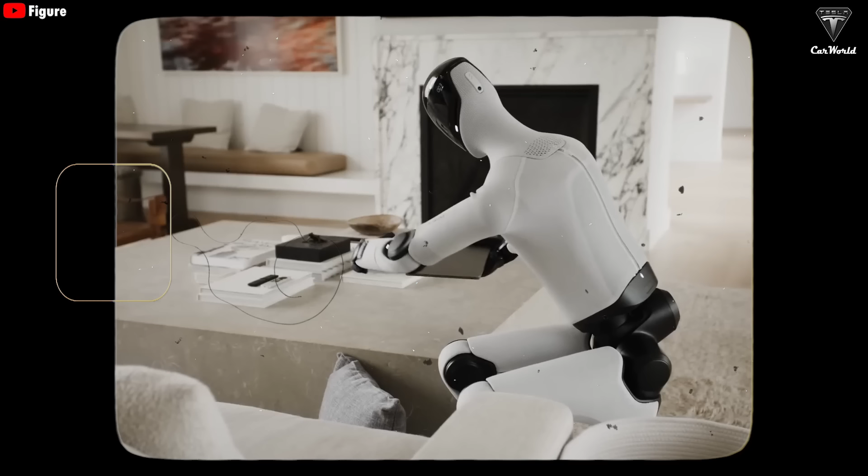We once dreamed about this in the 1970s science fiction movies. Now it's no longer just a cinematic special effect. Elon Musk promises that the Tesla bot Optimus will be a robot with a groundbreaking AI brain, capable of assisting humans with many tasks and household chores.

Tesla is the world leader in real-world AI, I would say. So, and then we're going to be making this robot Optimus, which is starting production hopefully summer next year.

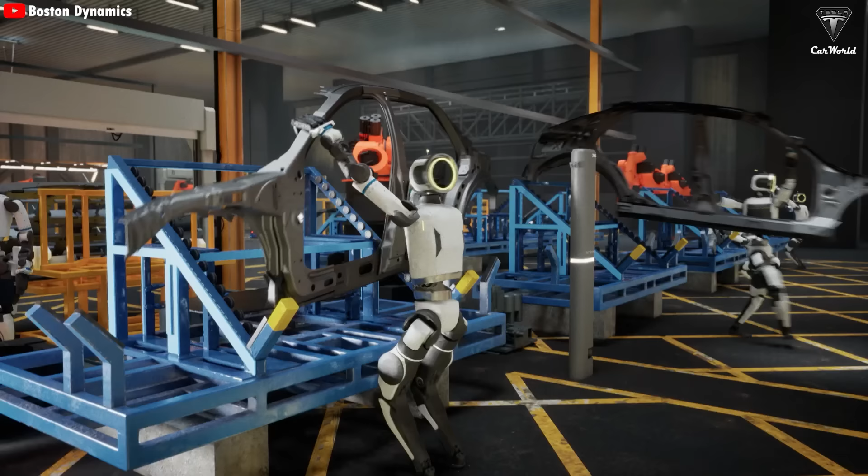Meanwhile, Boston Dynamics has just redefined the limits of precision engineering with its next-generation Atlas robot. Now it's time to officially take Atlas out of the lab. So for the first time ever in public, ladies and gentlemen, please welcome Atlas to the stage. Atlas's primary mission will be to move goods and components in warehouses and to take part in production lines at factories.

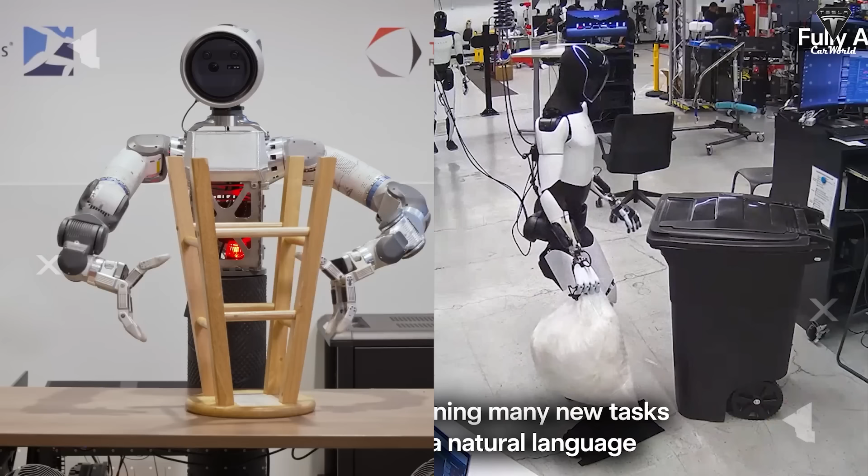But are these machines really ready to support us in real life? Today, we're going to set aside the marketing hype and dive into the truth. What does the future of America really look like? Let's find out right now.

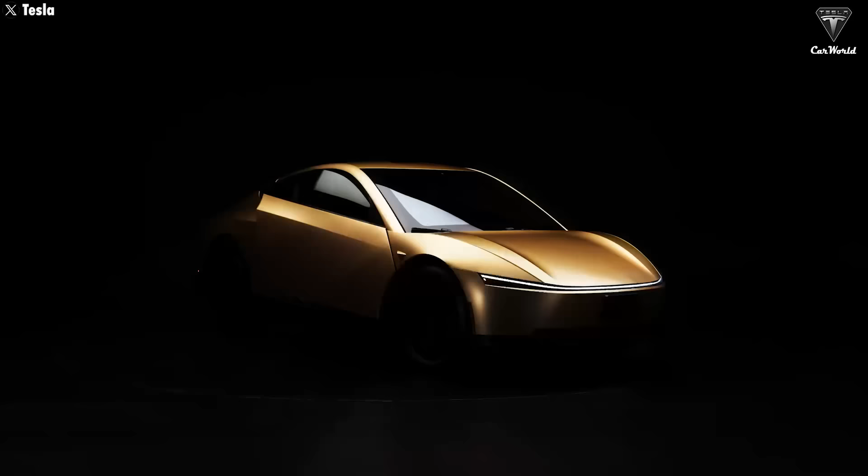We've already witnessed the computer revolution of the 1980s and the internet boom of the 1990s. Now you can probably feel a similar wave. AI and robotics are genuinely making reality hard to believe. Every time a video or image is posted online, most people comment, 'Is this AI?' That explains just how astonishing AI truly is.

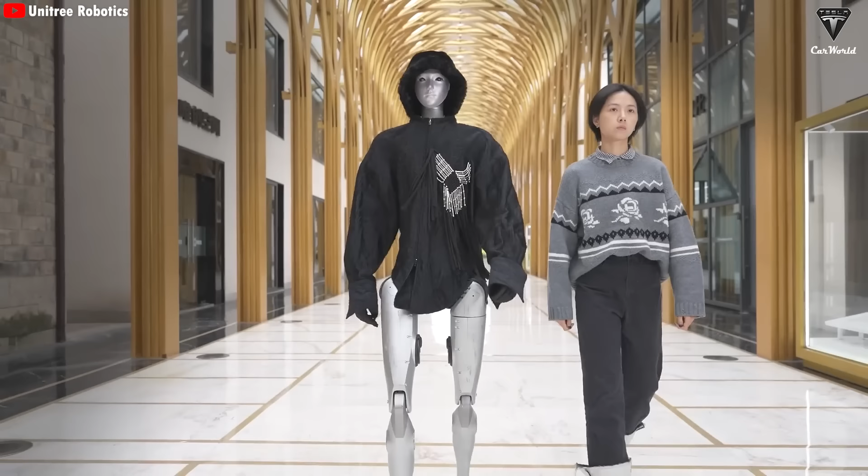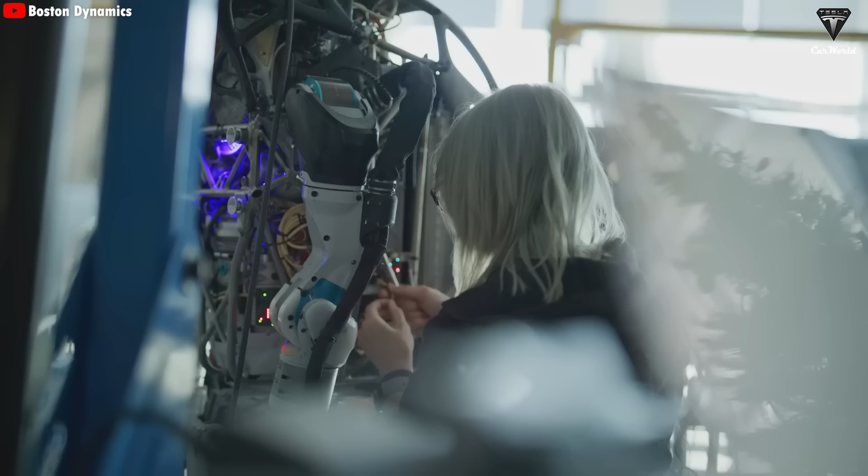This explosive growth has fueled an ever-growing ambition to embed AI into physical entities. That's why more and more humanoid robots are being created. For decades, Boston Dynamics has been the pioneering name dominating this field. They represent humanoid robotics in the US, doing it long before Tesla or any other company even considered it.

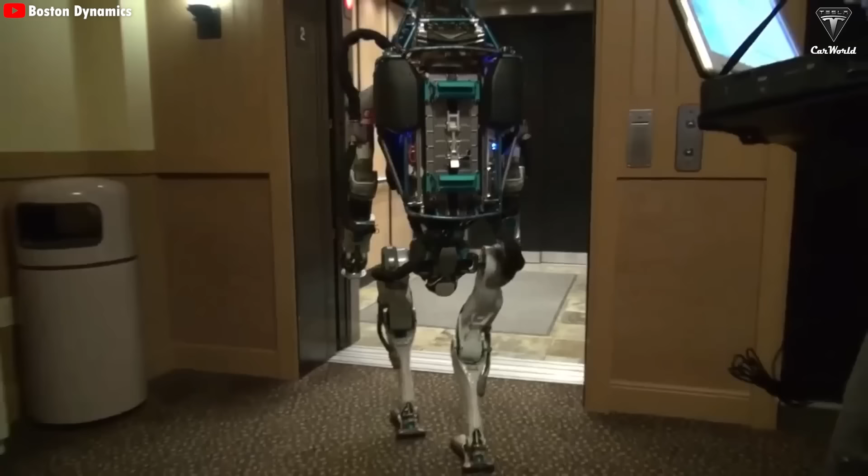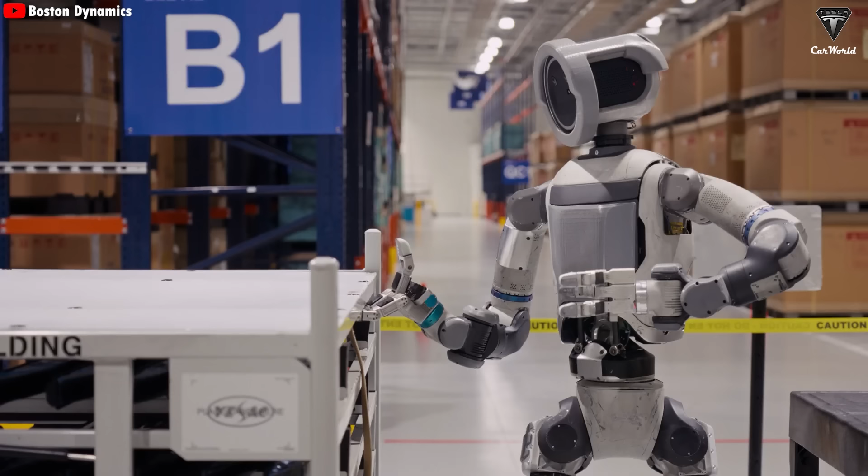Although early humanoid robot versions used powerful hydraulic systems that allowed them to perform acrobatics and traverse extremely rough terrain, hydraulic actuation is nearly impossible to manufacture at scale. That's why the newly launched, fully electric new Atlas has changed the game. It completely removes the limitations of human-like joints, allowing the robot to maneuver in tight spaces with a level of flexibility we've never seen in any biological organism.

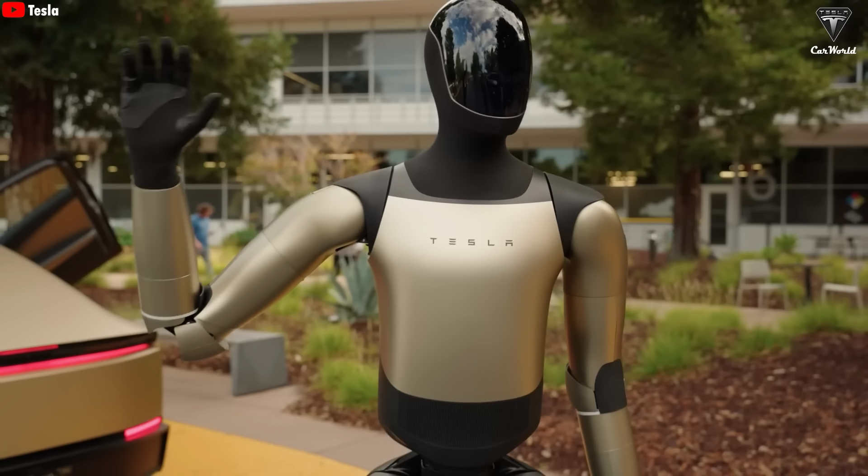However, on the other side, we have Elon Musk and Tesla. Elon Musk isn't trying to create an athlete or a show-off robot. Yeah, of course Optimus can run pretty fast and even dance, but that's only a small part of the picture. With Optimus Gen 3, Tesla's goal is far more practical: to create a worker, a helper. The key point isn't how far it can jump, but how dexterous its hands are.

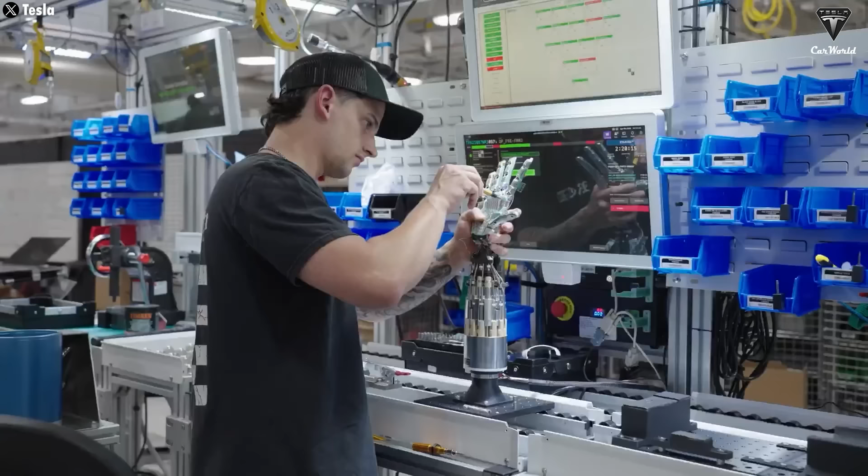Musk is betting on artificial intelligence and mass production to drive the price of a robot down to less than that of a car. On one side we have a hardware engineering giant trying to become smarter, and on the other, a software giant trying to perfect hardware.

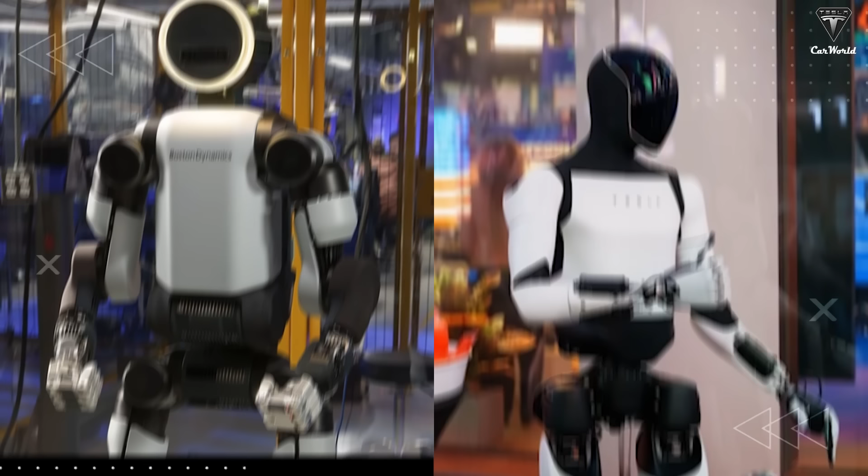Now we're going to take a detailed comparison of the design, hands, degrees of freedom, battery life, tactile sensor sensitivity, and the technologies inside these two humanoid robots.

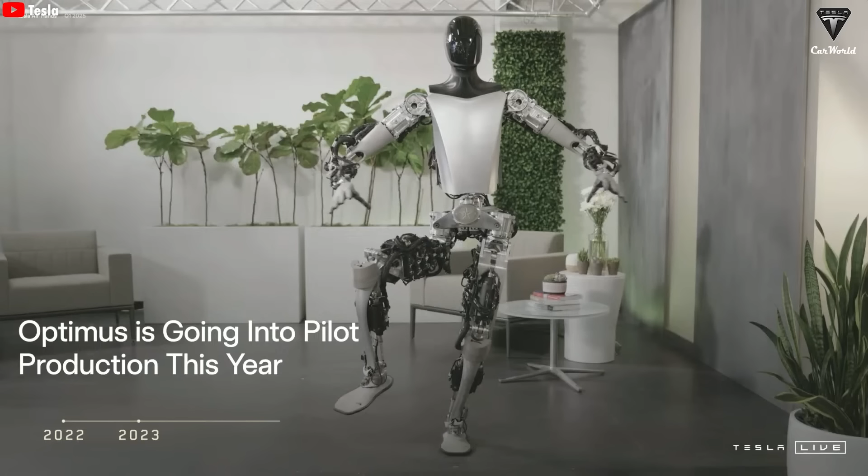Over time, we've witnessed Optimus and Atlas evolve from clumsy metal robots into sleek humanoid machines. If you look at Optimus in 2021, then Optimus Gen 1, Optimus Gen 2, and now version 2.5, it's clear that it has gone through significant improvements in appearance and materials, becoming far more refined than previous generations.

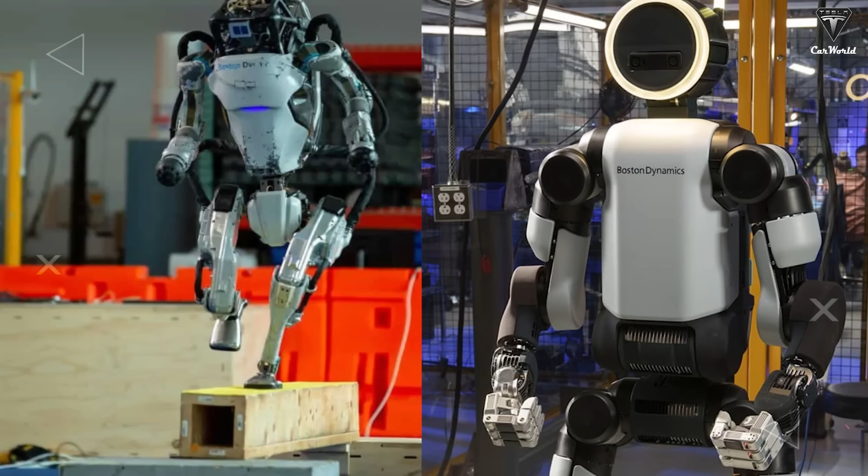Meanwhile, this is what Atlas looked like in past years, and this is the new Atlas that was recently unveiled on stage. Clearly, Atlas has completely abandoned its old design and re-emerged with a much more sophisticated humanoid form. The new version is almost unrecognizable, as it inherits virtually no features from the old robot.

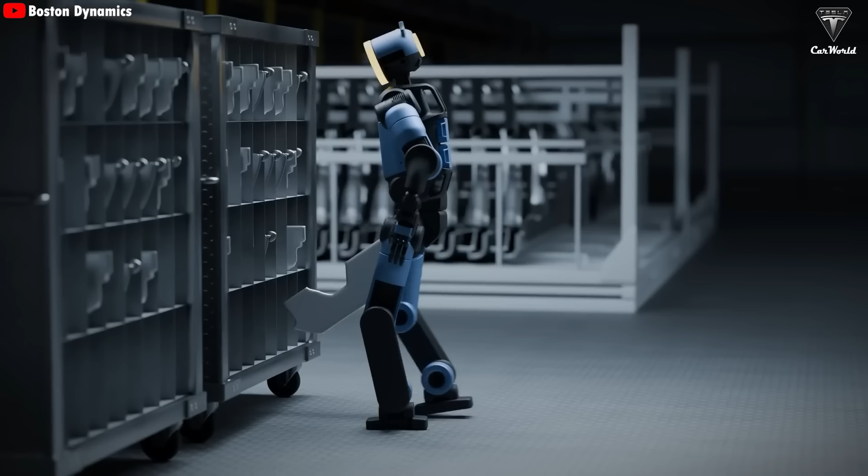Boston Dynamics' new Atlas marks a clear shift in design philosophy compared to earlier Atlas generations. It was unveiled at 6 feet 2 inches tall and weighing 198 pounds, and Boston Dynamics uses aluminum and titanium alloys for this new version.

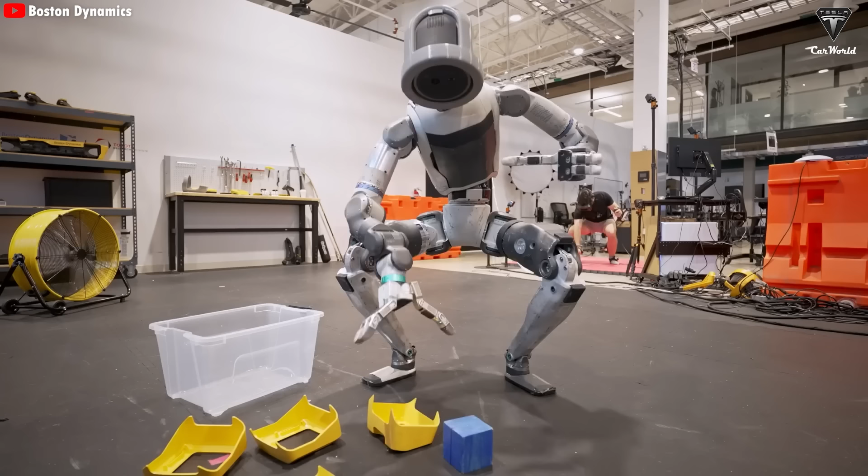Boston Dynamics CEO Robert Playter emphasized a major breakthrough in the new model: all of Atlas's joints can rotate 360 degrees, allowing it to perform complex movements with ease. As you can see in the way it stands up when first powered on, it's something that's both impressive and slightly uncanny.

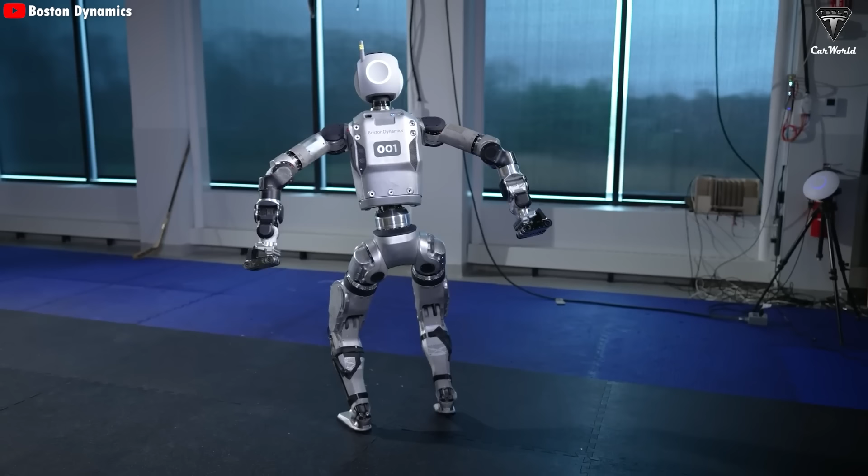Boston Dynamics has also stressed that Atlas's face was deliberately designed, a glowing circular display, so humans can clearly recognize it as a useful robot, rather than something trying to imitate a real human. We've also designed Atlas's head and face very purposefully.

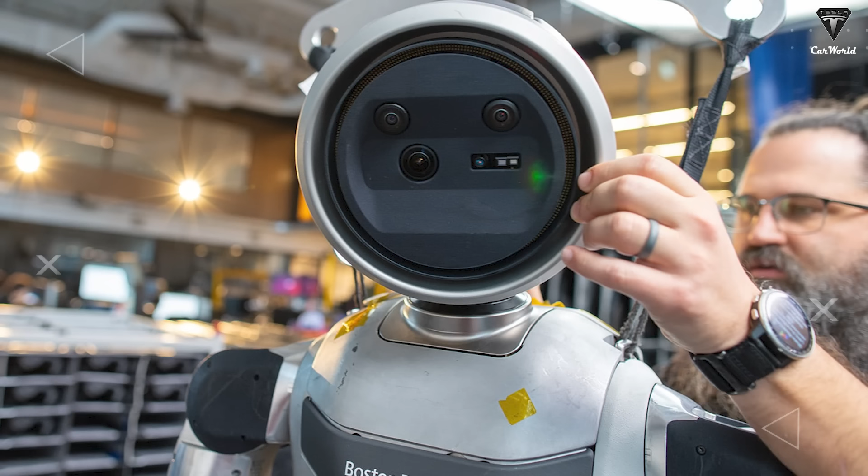We want folks working with Atlas to know that Atlas is a helpful robot, not a person. Instead of mimicking a human face or trying to appear friendly, the robot's head is designed as a compact, sealed engineering module that's clean, minimal, and non-expressive.

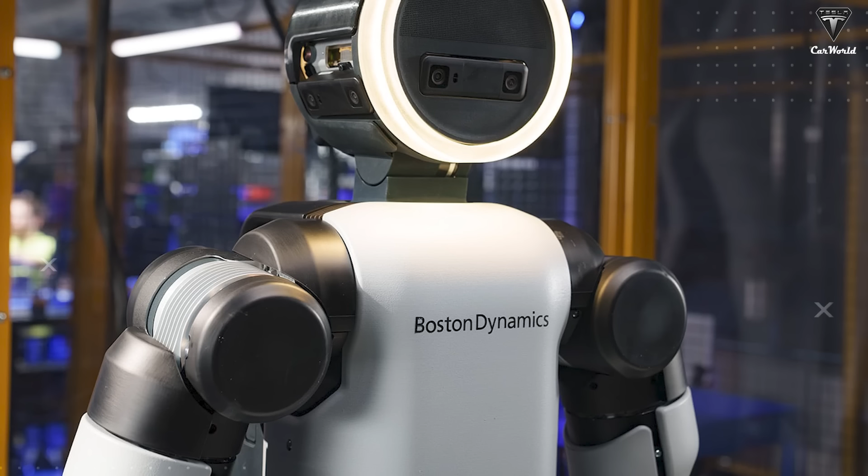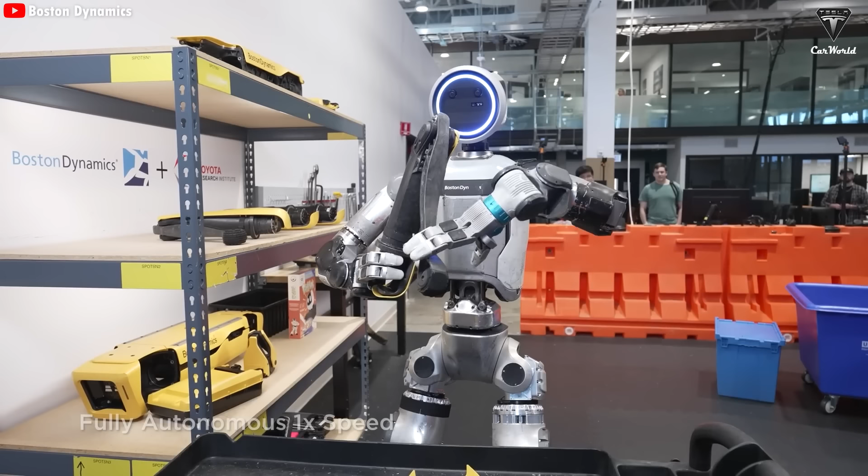Its simple geometry, flat surfaces, and seamless exterior help protect the internal sensor systems. The new Atlas head functions as a perception hub, not a communication tool. Vision and positioning sensors are discreetly integrated rather than showcased, allowing the robot to observe its surroundings, identify objects, and

navigate with high precision. Rather than exposing complex mechanical details, new Atlas adopts a cleaner, more industrial and practical style by abandoning the old hydraulic system and moving to a fully electric design. This reflects a clear push toward commercialization and greater efficiency in real-world work environments.

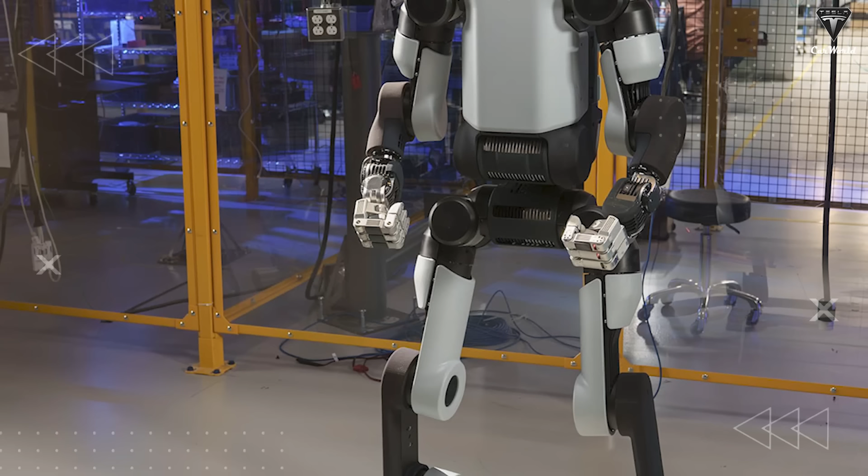If you look closely, the robot's entire body features clearly defined geometric forms, flat surface panels, and minimal unnecessary details, giving it a solid feel and making it easier to maintain. You can also see that the joints are more enclosed, reducing exposed wiring. This increases durability and lowers the risk of damage during impacts.

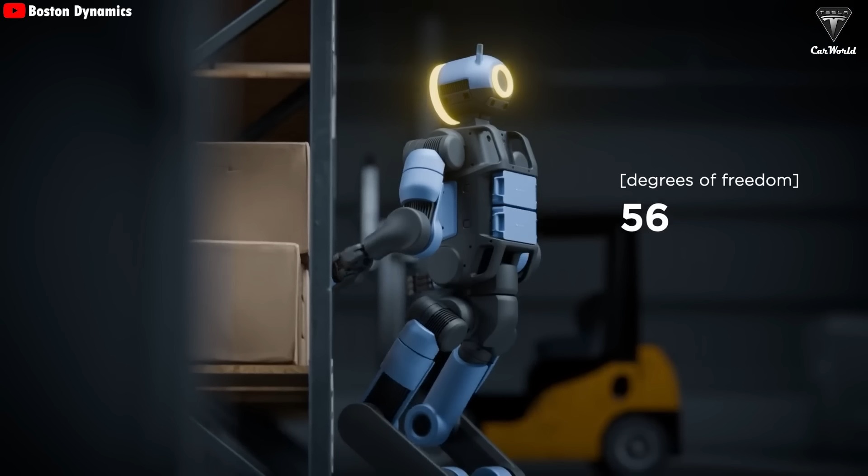The new Atlas can also reach up to 7.5 feet, allowing it to handle and transport items or components stored at higher levels. Turning to Optimus, we've talked a lot about its design already.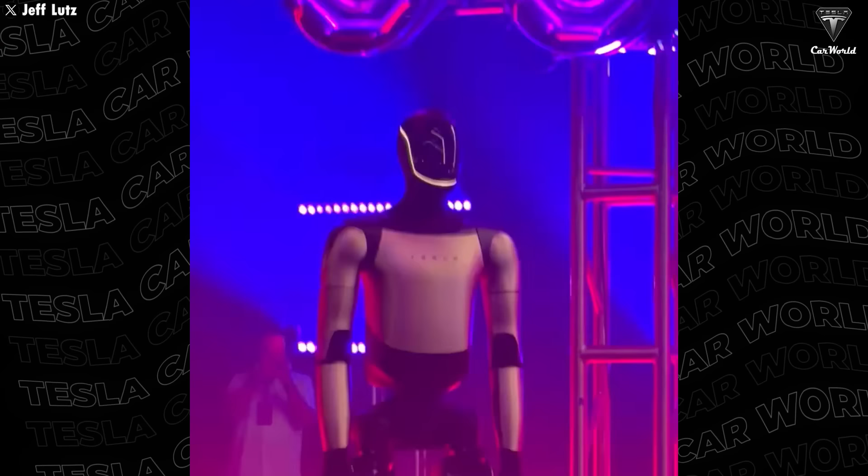For now, we're really looking forward to Optimus 3, which is expected to be unveiled next month, and according to Elon Musk, will look astonishingly human-like. When you see Optimus 3, it will seem as though there's someone like a person in a robot outfit, which is how we started with Optimus.

At the moment, with Optimus version 2.5, Optimus already has what can be considered one of the best body proportions and overall designs on the market. To be honest, we still haven't seen anyone do design better than Tesla.

Don't get us wrong, that doesn't mean other robots look bad. It's just that the Tesla bot feels a bit more polished. Version 2.5 doesn't introduce many major changes compared to version 2: a gold color scheme and better built arms, with fewer exposed cables.

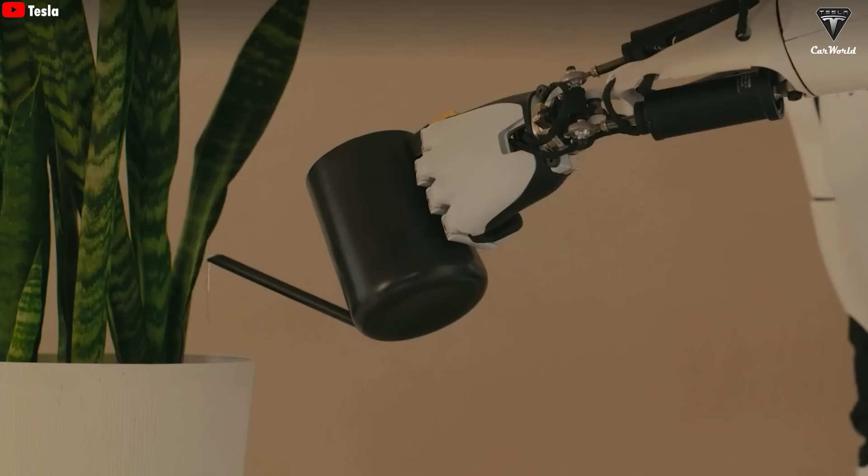Compared to Atlas, Optimus has slightly more balanced dimensions and weight, standing at 5 feet 8 inches tall and weighing 125 pounds. Of course, each manufacturer has its own goals and strategies when it comes to robot design.

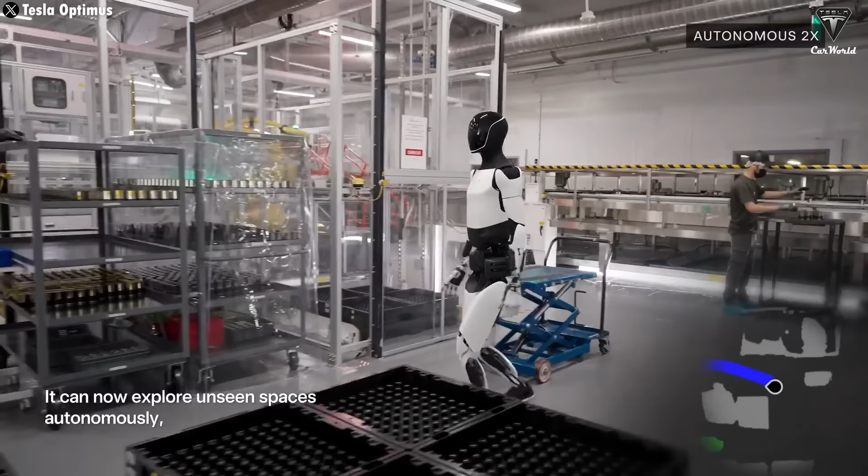Moving on to battery life, so far Tesla has only revealed that the Tesla bot will use 4680 battery cells, and Elon Musk has stated that Optimus could operate for an entire day with productivity up to 5 times that of a human.

Like if Optimus, I think, could probably achieve 5x the productivity of a person per year because it can operate 24/7. It doesn't even need to charge. It can operate tethered, so it's plugged in the whole time.

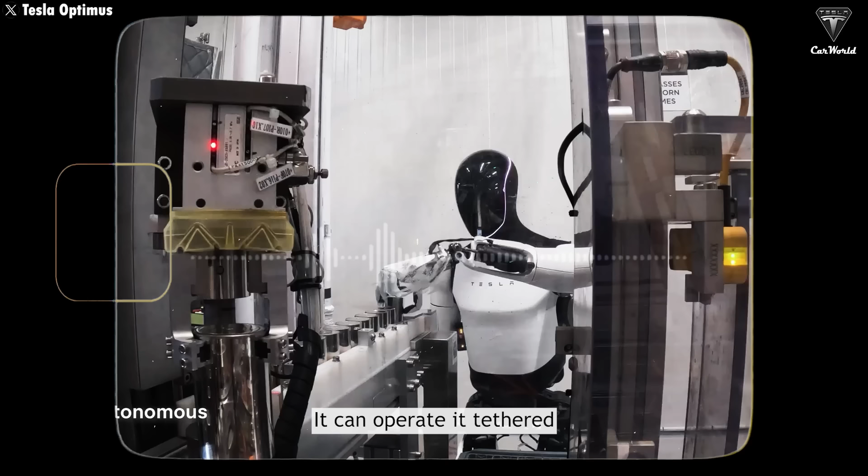So we still can't say for sure how long the Tesla bot can operate continuously, but it's likely around 8 hours. After all, Tesla has enormous battery resources and extensive real-world experience with electric vehicle batteries, which could be one of its key strengths.

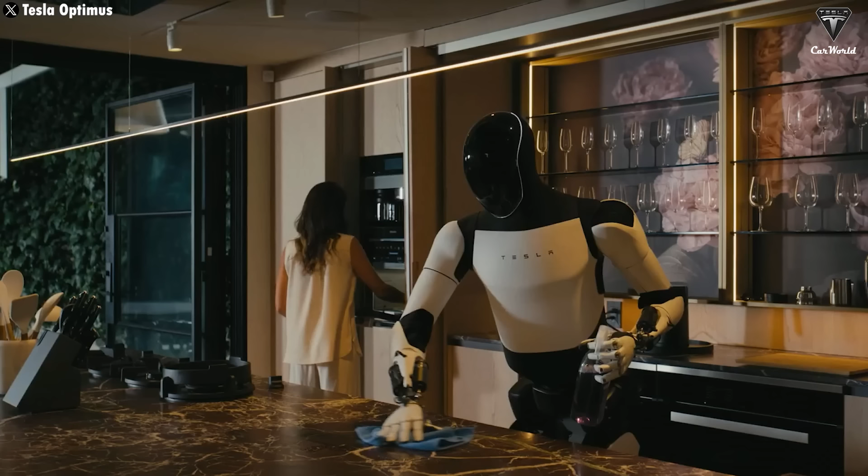Back in 2022, the Tesla bot prototype was introduced with a 2.3 kilowatt-hour battery pack, but as of now, we still don't know how much Tesla has upgraded the battery for version 2.5.

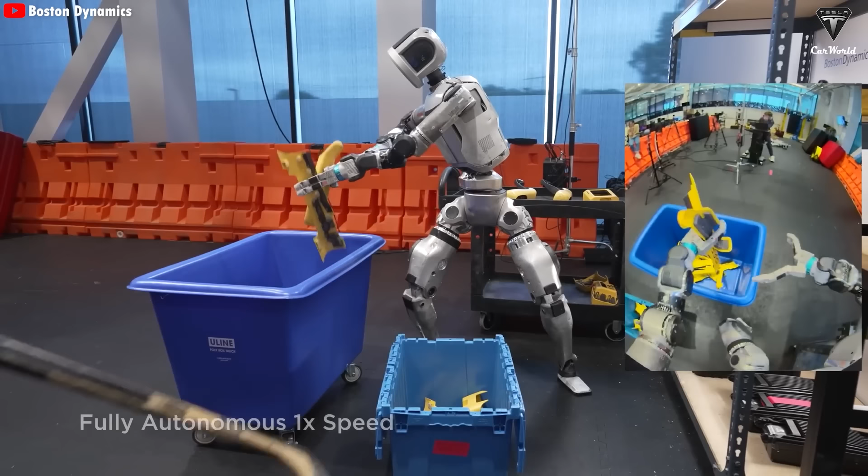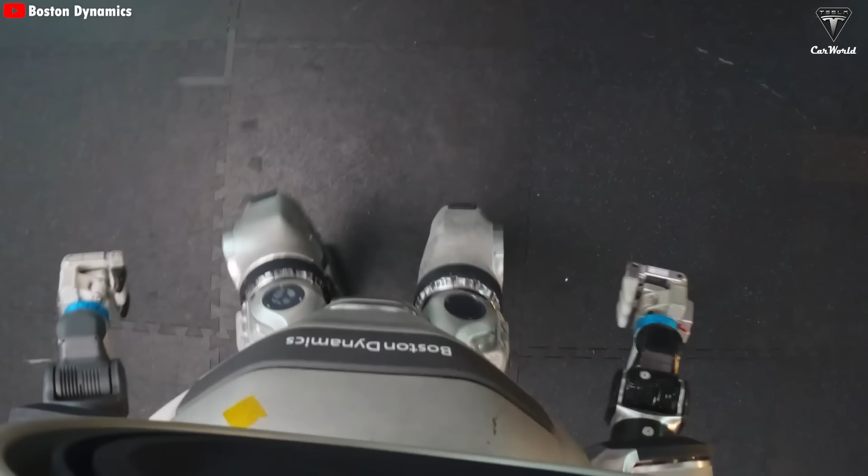Meanwhile, Boston Dynamics has announced that Atlas can operate continuously for about 4 hours. The real breakthrough lies in its dual battery system with automatic swapping. Similar to the Tesla bot, when the battery runs low, Atlas can autonomously return to its station, swap in a fresh battery, and immediately get back to work, ensuring that production lines are not disrupted.

But that's not the biggest breakthrough in the new version. New Atlas marks a major engineering leap with a total of 56 degrees of freedom. This number is double that of the now retired hydraulic version.

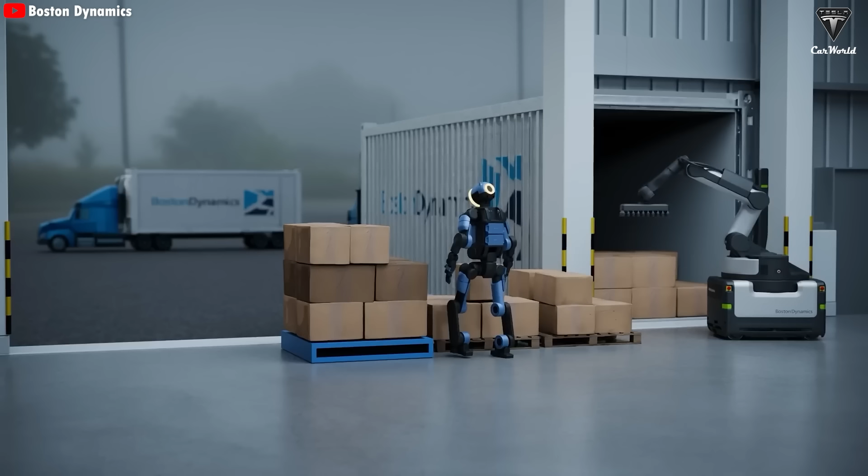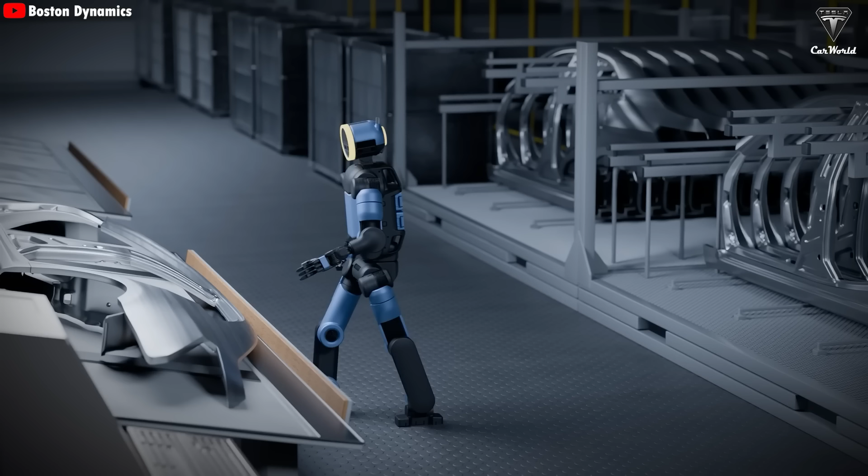As you can see in task demonstrations, the robot achieves a level of flexibility far beyond the movement limits of previous models. Of course, some scenes of Atlas performing tasks are still partially created using computer graphics for simulation, so we're only focusing on what these robots have actually proven in real-world demonstrations.

Thanks to its advanced electric joint system, with 360-degree rotation at key points such as the hips, neck, and waist, Atlas can perform complex movements, stand up from awkward positions, and move efficiently in tight spaces without needing to rotate its entire body.

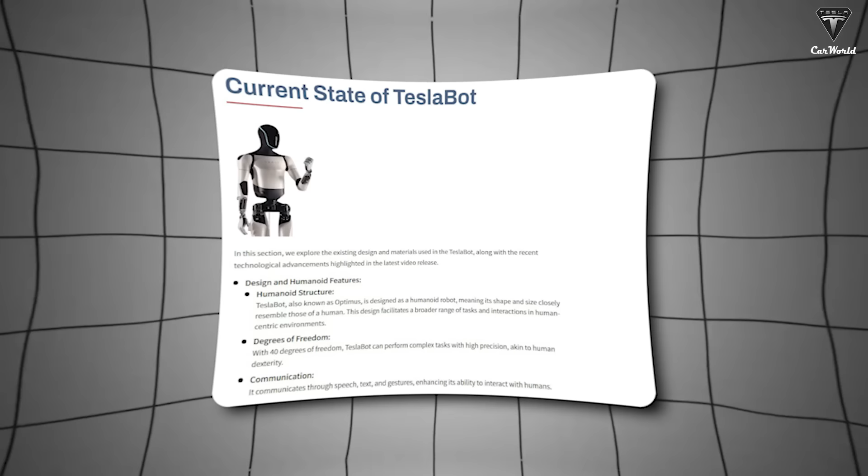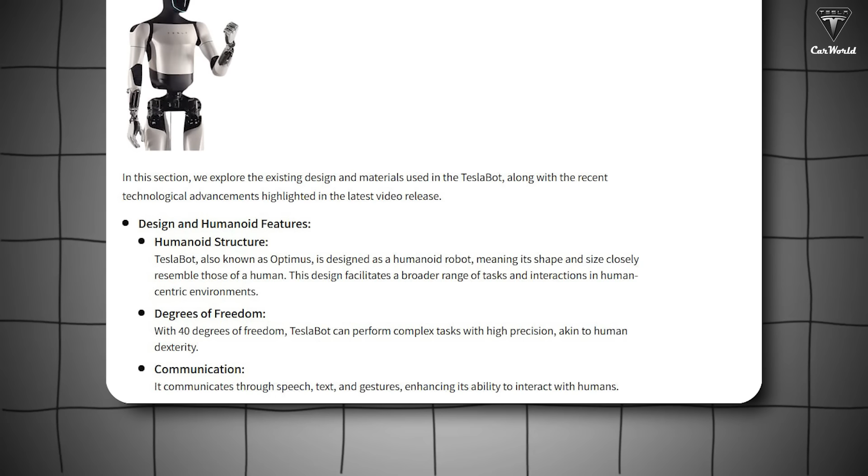Elon Musk has not yet disclosed the total number of degrees of freedom for Optimus, but based on information from ChatGPT and Google, estimates suggest that Optimus currently has around 40 to 44 degrees of freedom, fewer than Boston Dynamics' Atlas. However, this does not significantly affect the level of dexterity the Tesla bot can achieve.

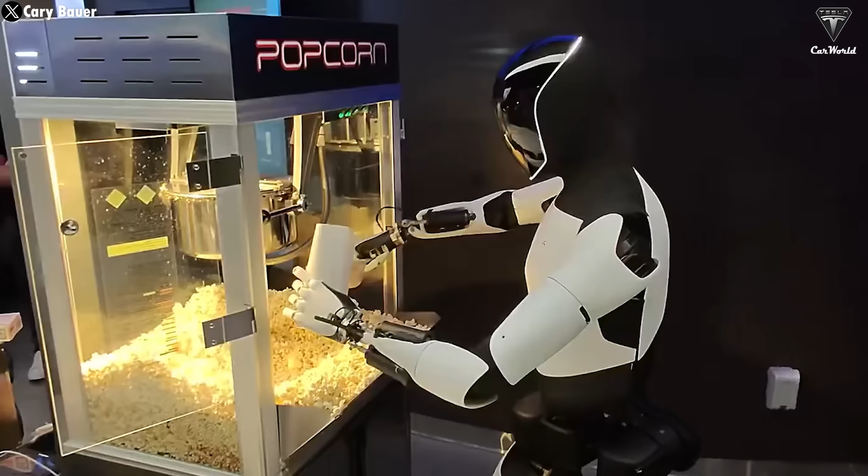We've already seen it perform some quite impressive tasks, right? It even served drinks and popcorn at several events last year.

That said, we've seen very limited demonstrations of Tesla bot lifting heavy objects. The last notable example was when it carried a 24-pound battery tray inside a factory. By contrast, Boston Dynamics states that Atlas can lift loads of up to 110 pounds, with a sustained working load of 66 pounds. This gives Atlas an advantage in certain tasks compared to Optimus.

What do you think about this aspect? Would you choose Optimus or Atlas if you needed it to bring you a beer?

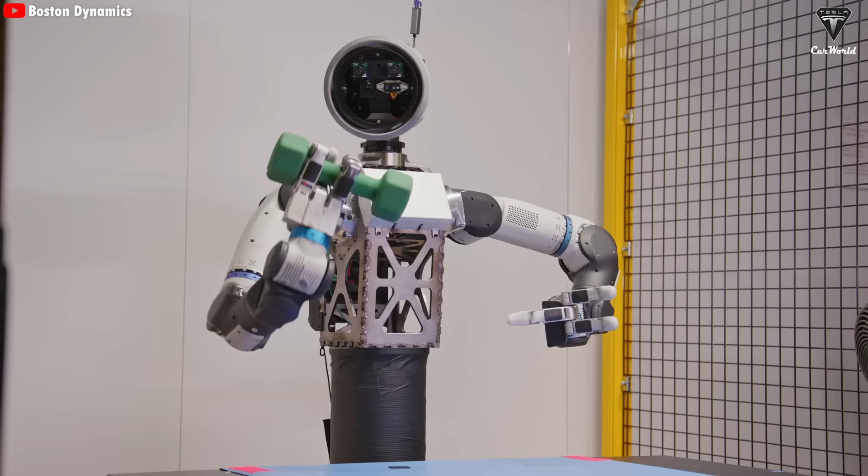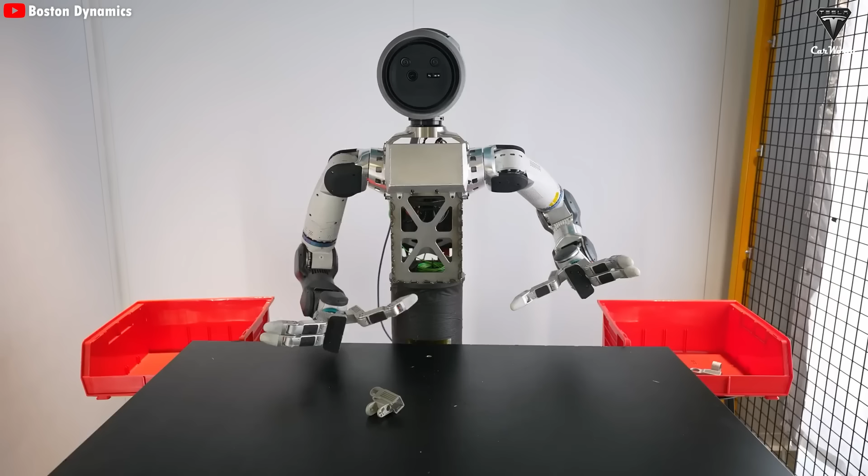First, autonomous mode represents the pinnacle of hardware AI integration. Atlas is confirmed to be equipped with advanced artificial intelligence powered by NVIDIA chips, enabling it to learn new tasks. In this mode, the robot operates using machine learning models and data from its computer vision sensor systems. Instead of needing humans to command every single step, Atlas can perceive its surroundings, build a real-time 3D map, and make its own decisions to complete predefined tasks, such as moving components inside a factory from point A to point B. This autonomous capability is powered by reinforcement learning algorithms, allowing the robot to maintain balance and handle unexpected situations like obstacles or slippery surfaces without external intervention.

In essence, this mode of operation is very similar to the direction Tesla is pursuing with Optimus. Optimus uses the same AI brain as Tesla vehicles to process data. It can recognize objects, analyze situations, make predictions, and plan movements in real time.

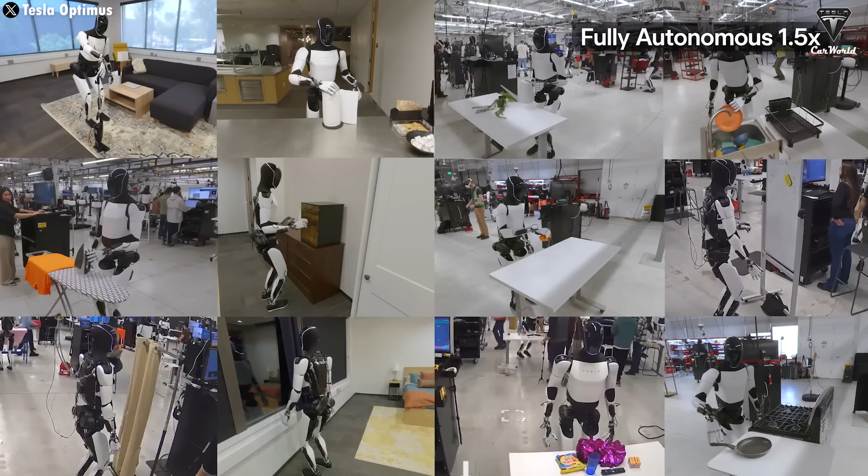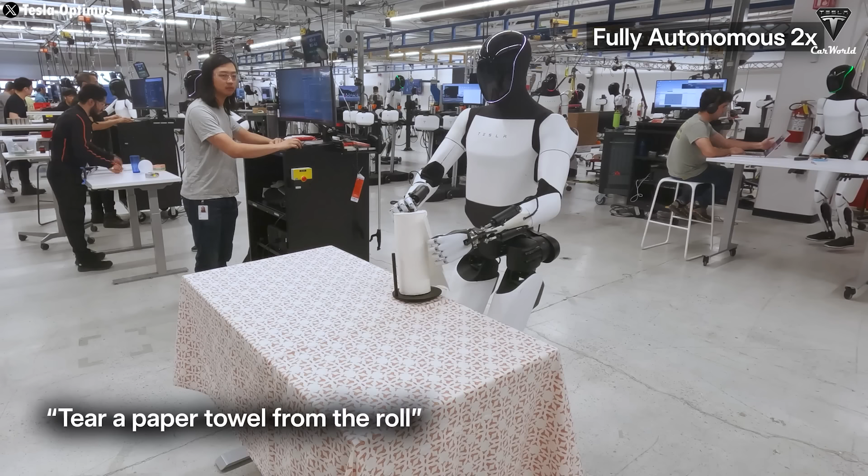To perform useful tasks, Optimus is trained on billions of video frames. Notably, Tesla engineers wear motion capture suits to demonstrate sample actions, such as picking up parts or folding clothes, which the robot then learns and reproduces on its own. Thanks to this training data and its ability to analyze and predict scenarios, the robot can navigate, avoid obstacles, and carry out delicate tasks without humans controlling every step.

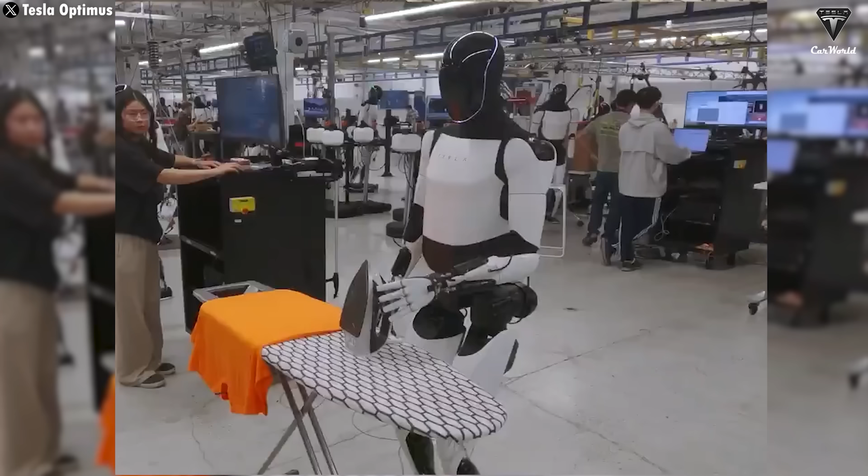Boston Dynamics has stated that once Atlas learns a new task, that capability can be instantly replicated across the entire robot fleet. Yeah, this closely mirrors Tesla's data-sharing approach as well. When one Optimus learns how to cook, that knowledge can be shared across the entire network of other Optimus robots instead of training each one individually.

This is truly a major leap forward for both companies. Once again, what do you think? If you owned both of these robots in your home, would you be willing to pay for them?

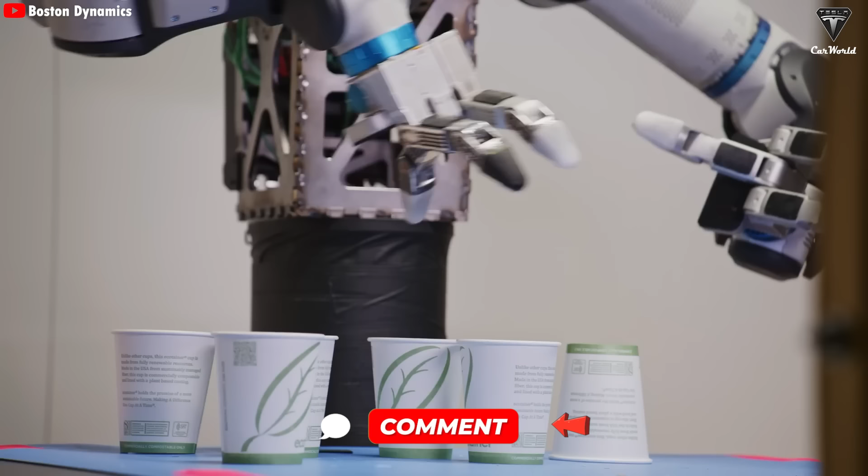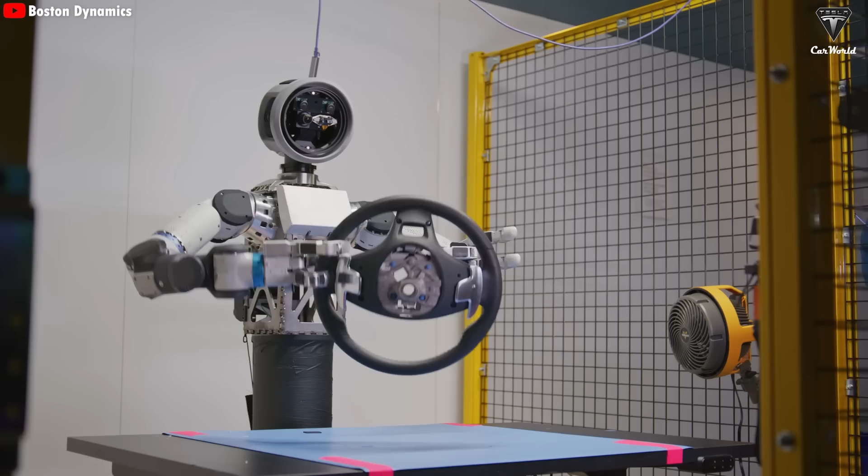Let's go back to the second mode Boston Dynamics introduced, teleoperation. This mode plays a crucial role in training and handling tasks that require high precision and fine motor skills. Engineers can use motion capture suits or VR equipment to step into the robot. When a human performs a movement, the control software translates that data into corresponding motor commands for Atlas.

This is exactly how Boston Dynamics collects behavioral data to train its AI. Humans demonstrate, the robot records, and then optimizes the action.

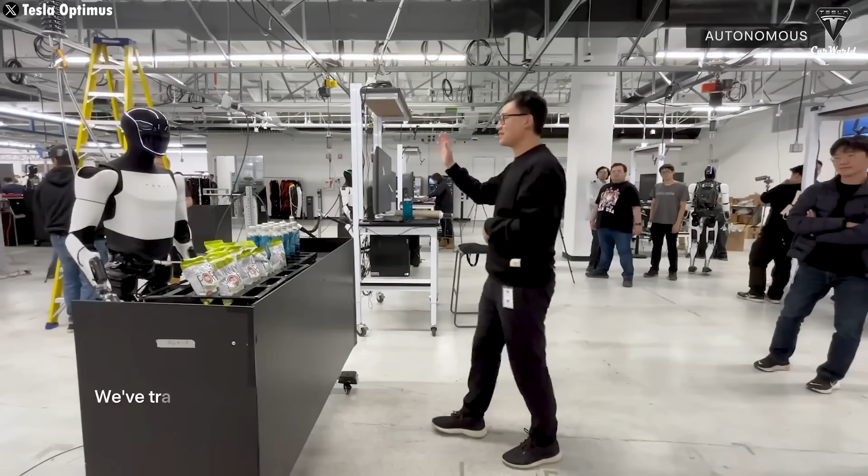Tesla is doing something very similar with Optimus, but clearly public opinion has been more negative toward Tesla. Part of this is because Elon Musk rarely mentions that the Tesla bot is remotely controlled during training, which has led many people to assume that Optimus is already fully autonomous.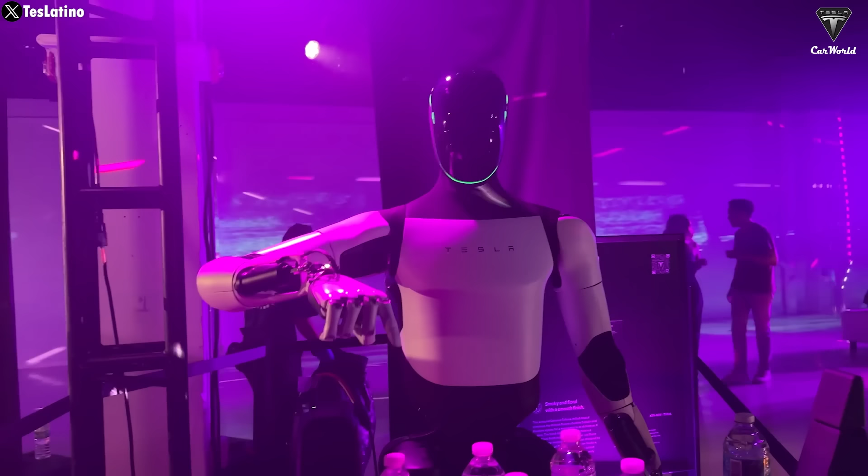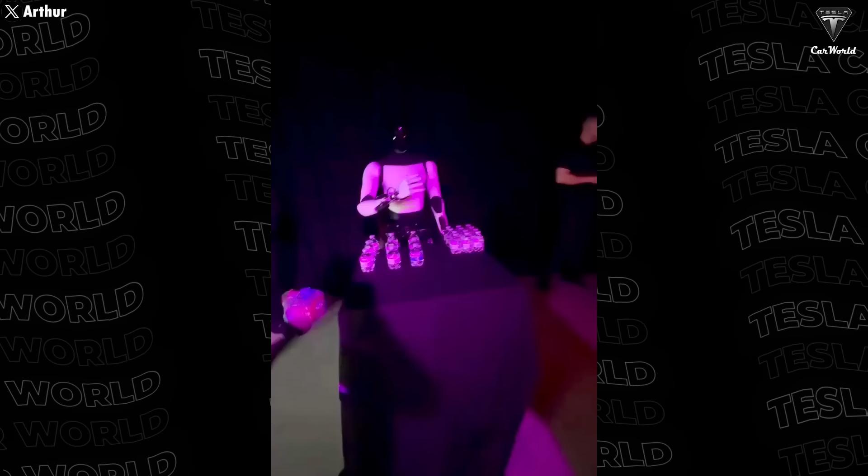One of the most heated discussions came after the incident where Optimus fell during an event late last year. It was later revealed that the robot was being teleoperated rather than acting autonomously. This incident caused people to question Tesla's progress with humanoid robots and increased skepticism toward the use of teleoperation in robot training.

What do you think about humanoid robots being teleoperated to perform tasks? Let us know your views.

Okay, finally, there's the tablet-based control interface via the Orbit software. Boston Dynamics states that the robot can easily connect to MES, WMS, and other industrial systems through Boston Dynamics Orbit software.

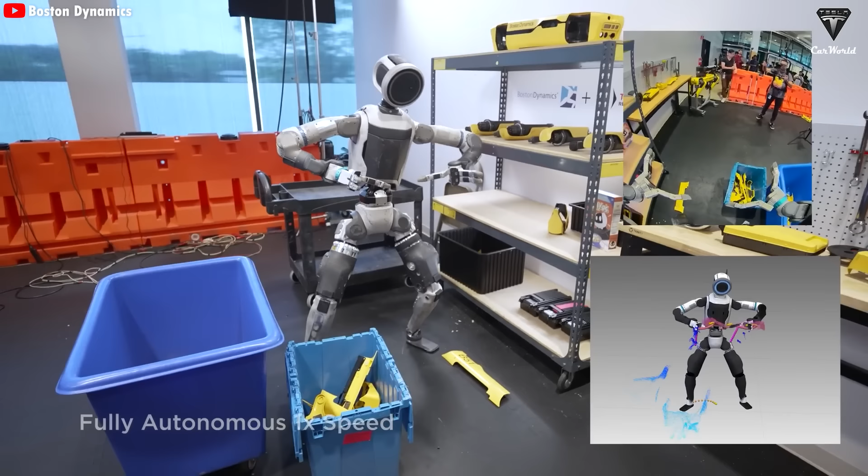This is the most management-oriented and practical operating method in an industrial environment. Instead of using complex joysticks, operators only need to tap and drag on a touchscreen to set destinations or select pre-programmed action scenarios. The interface provides a comprehensive overview of battery status, operational maps, and live video feeds from the robot's eyes, making it as easy to supervise an entire fleet of Atlas robots as controlling a smart device at home. The combination of these 3 modes creates a complete operational ecosystem, allowing Atlas to operate with independent intelligence while still coordinating smoothly under human supervision.

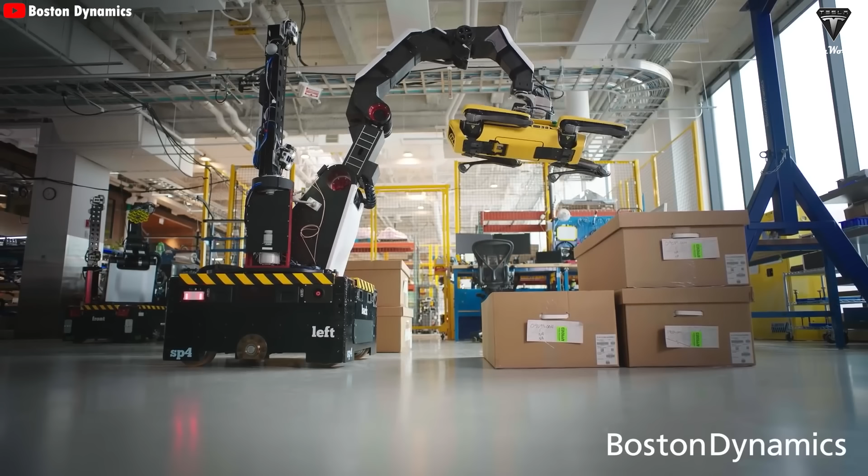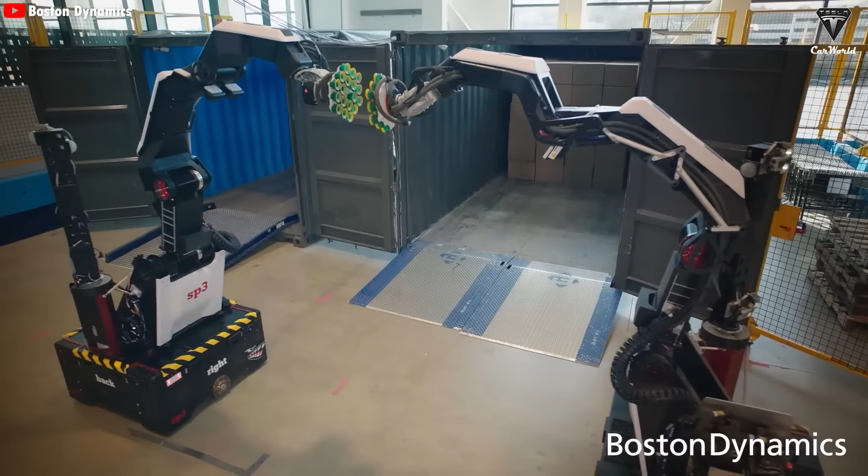Hyundai acquired Boston Dynamics in 2021 in a deal that valued the company at $1.1 billion. The automaker has long predicted that robots would become increasingly common in its factories over time. And with today's demonstration, Hyundai hopes to prove that its robots are more advanced and capable of handling physical tasks better than Tesla's Optimus. Meanwhile, Tesla has ridden the recent boom in artificial intelligence to reach a market capitalization of over $1 trillion, more than 15 times that of Hyundai.

Elon Musk has repeatedly emphasized that Tesla Optimus will be the company's #1 product and the most promising path to turning Tesla into a $25 trillion company.

However, there is a significant gap between the expected prices of Atlas and Optimus. Transitioning Atlas from a research platform to a commercial robot is certainly a major milestone for Boston Dynamics and its parent company. That said, mass-producing Atlas will undoubtedly be an extremely costly effort for Hyundai. While the company has not disclosed Atlas's production cost, Boston Dynamics sells its Spot robot for around $75,000 per unit. As a result, we wouldn't be surprised if Atlas ends up costing roughly 3 times as much as the Spot robot.

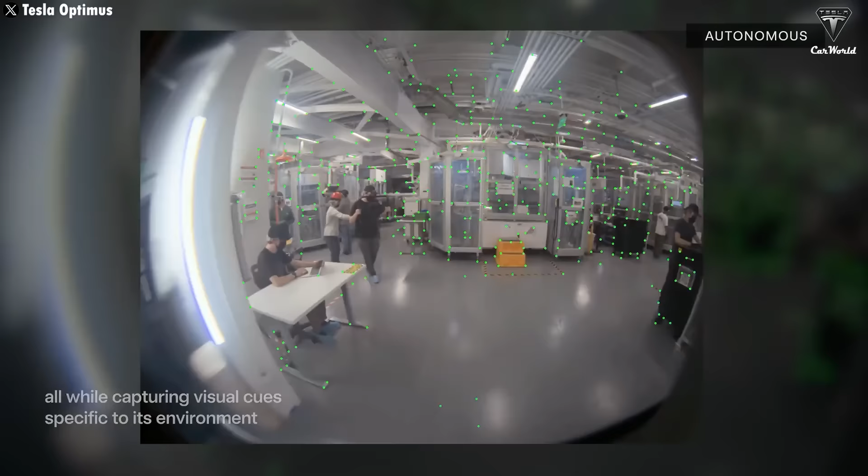On the other hand, Elon Musk has said at least 5 times that once Tesla can produce around 1 million Optimus robots per year, the final price of Optimus could drop to roughly $20,000 to $30,000. Yeah, basically half the price of a car.

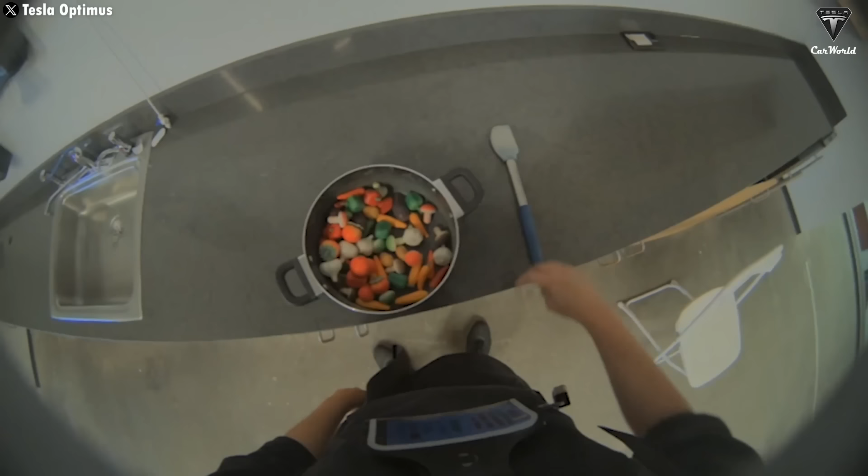Elon Musk's strategy is pretty straightforward: mass production to drive costs down. Tesla isn't just building robots. They're setting up a massive manufacturing operation, similar to what they did with electric vehicles. They already have the factories and the ability to design everything in-house, from AI chips and batteries to mechanical joints, allowing them to control costs down to the last dollar. Tesla's goal is to turn Optimus into a household product anyone can afford, essentially a personal helper that costs about as much as a used car.

Of course, there's still a long road ahead before they reach that price point. We expect the initial price to land somewhere between $80,000 and $120,000.

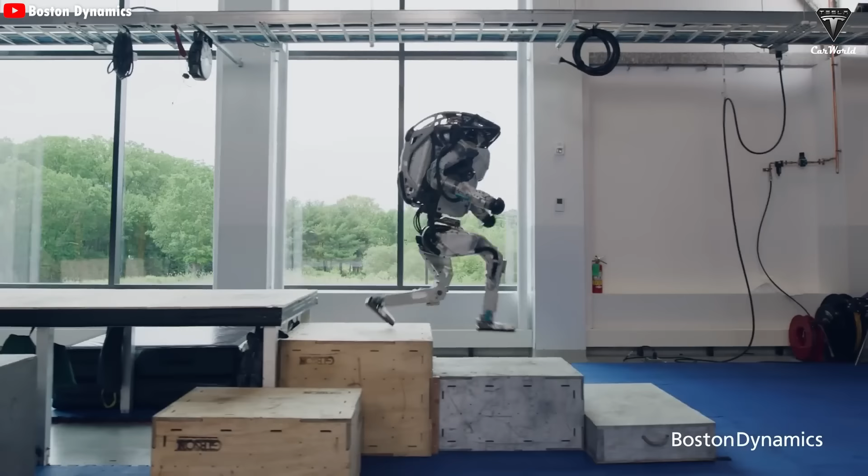For years, Boston Dynamics has captured the public's imagination with jaw-dropping demos of its humanoid robot, Atlas, doing backflips, breakdancing, and executing unbelievably precise movements. These performances made robots feel more approachable, even entertaining, rather than like tools for labor.

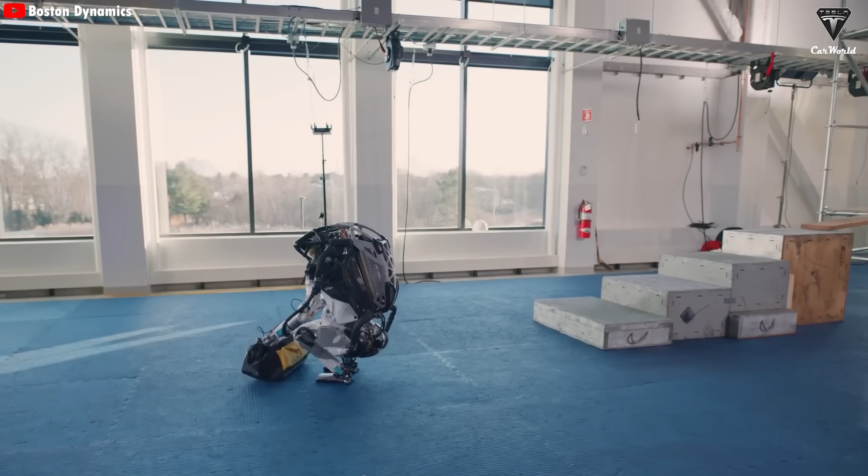That image may soon change as Hyundai plans to put Atlas to work in real factory environments. Once robots stop performing and start doing actual production jobs, public perception of friendly robots could shift, especially as concerns grow about robots replacing human workers. And those concerns aren't unfounded.

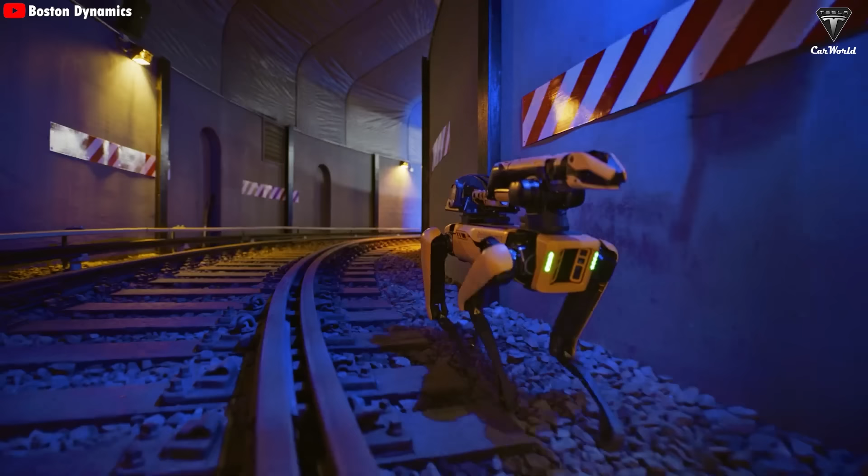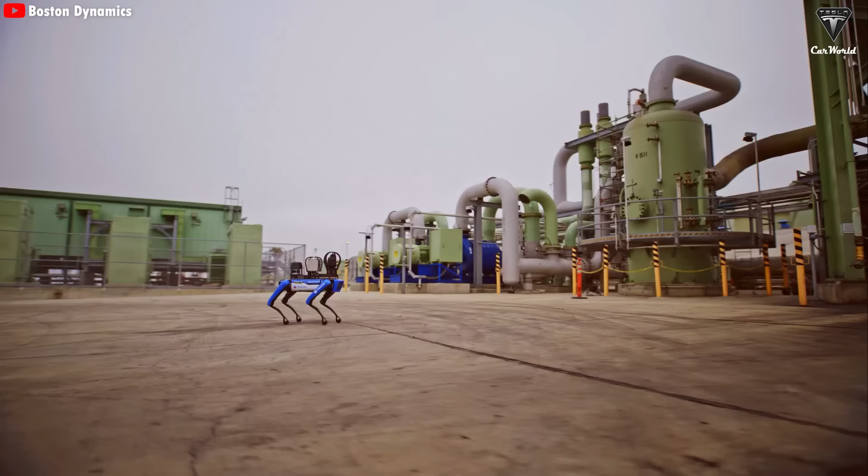Leaked strategy documents suggest Amazon expects robots to replace over 600,000 jobs in the US by 2033. On the flip side, Hyundai says its $21 billion investment in the US by 2028 will create 14,000 direct jobs and more than 100,000 jobs total, when indirect employment is included. This highlights an important point. Automation isn't just about job losses, it's about a fundamental reshaping of the labor market.

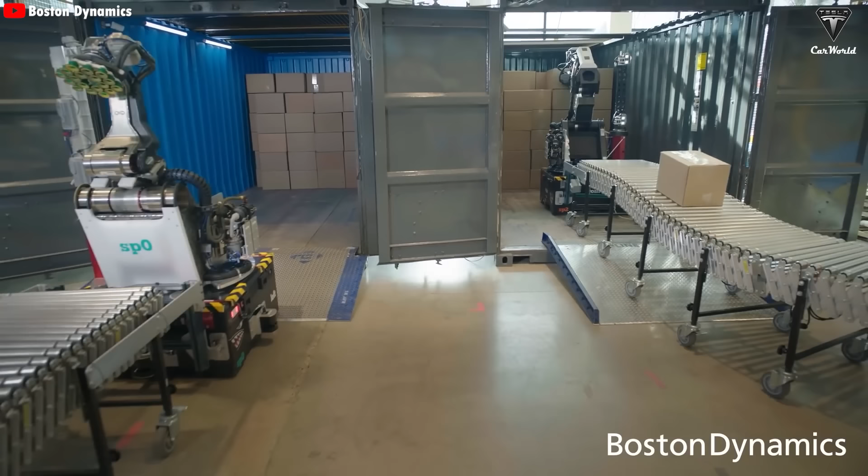At the same time, Hyundai is aggressively building out the technology platform behind its robotics ambitions. The company has announced a partnership with DeepMind, Google's AI research lab, aiming to combine Boston Dynamics' mechanical expertise with cutting-edge foundation AI models. On top of that, Hyundai is also leveraging NVIDIA's AI chips and software to accelerate how its robots learn and operate.

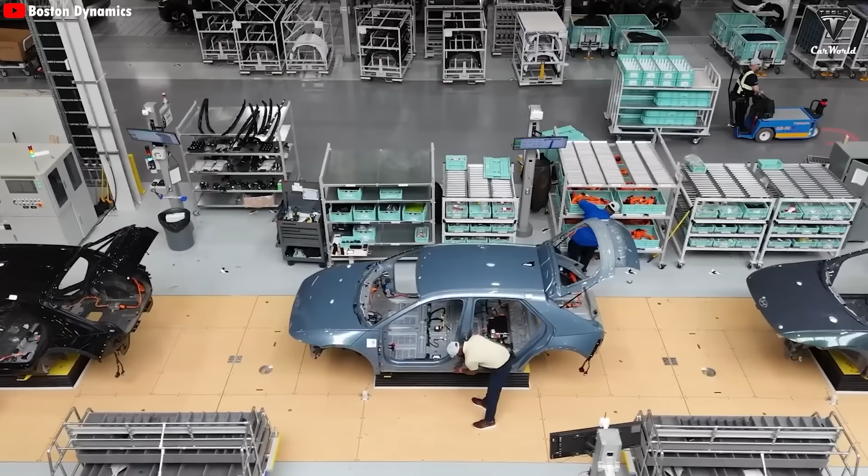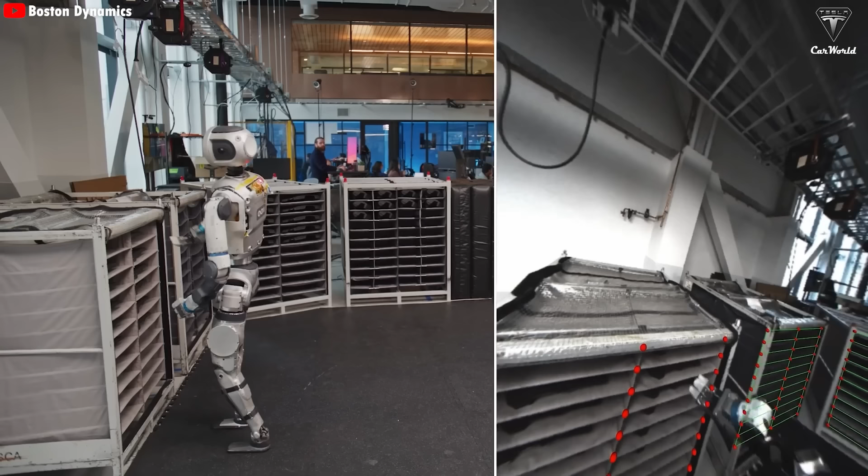That said, the gap between impressive demos and robots that can work reliably, efficiently, and actually justify their massive investment costs remains a major challenge. Closing that gap won't be easy, and it's likely to be one of the toughest problems both Hyundai and Boston Dynamics will have to solve in the coming years.